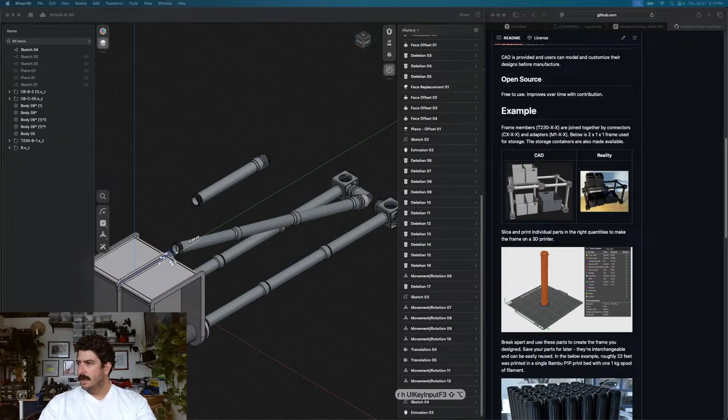Okay, this is going to be a silly one. Behind me, you'll see a bike. That's a ledge. I'd like to hang my bike from that ledge. I'm going to design a frame to do that. I've already gotten started. Kind of sit here. This is using the tinyFrame system I developed.

So tinyFrame is a modular framing system, and it's made of pieces that you can easily 3D print. And it lets you create things like this. Think of it as like PVC. These I keep in a box, and they're great because I can quickly pick them apart, assemble them, and then put them in the storage box like this. See? Like I said, just like PVC.

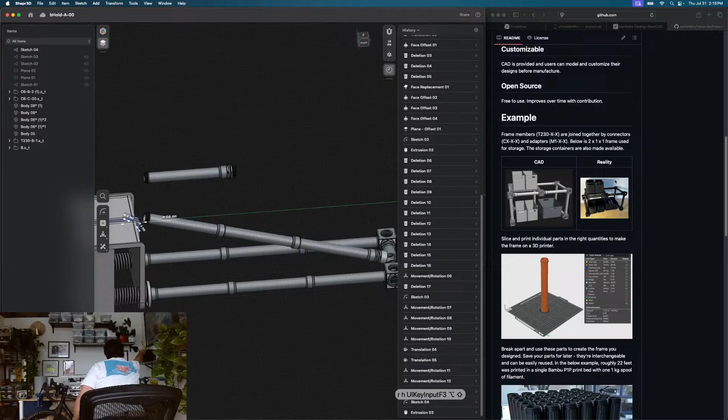And you join them with blocks like this. You just print a bunch of them, and you leave them around. And when you need them, like I do right now, you pull out the replaceable and reusable pieces, and then you design small custom components to make it work. And that's what I've done here. So we're actually going to go through and just design this thing real quick.

So it's really, I love this framing system. I initially designed it for a humanoid robot that I'm working on, just as a quick sort of tooling framing system replacement. Because you never know, you might need to hold just the torso, you might need to hold just the arm, and so being able to quickly rough in some design in CAD and then pull it apart is very cool. So we're going to do that right now. Except we're going to do it to hang my bike.

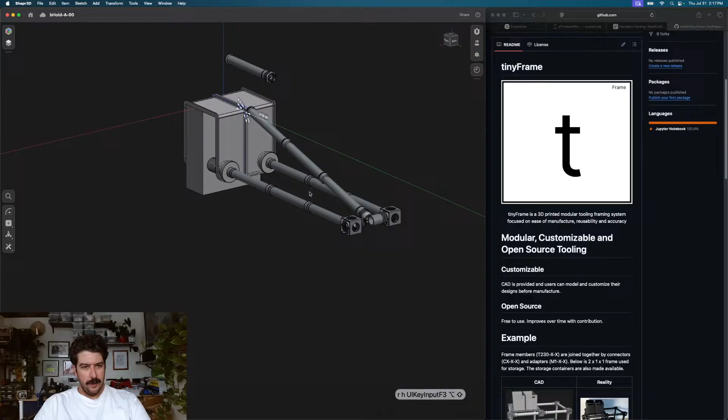My wife, by the way, hates this idea. She does not want this. As a matter of fact, you can't see it, but there's a closet to my right, which might be obstructed by this. So she might veto this, give her veto rights. But nevertheless, we want to design this because it's fun. So we're going to design this for fun. And she will veto it if she wants.

And then, after I finish this real quick, we're going to move on back to the part tumbler here. But this is just going to take 20, 30 minutes, hopefully, maybe an hour. Anyways.

Okay, so I was just creating the mounting holes for this. So the way this works is these members will be in tension. The bike's going to hang from here. We will put these members in compression, and everything's going to be great. Actually, yeah, let me finish this detail, and then we'll get back to this.

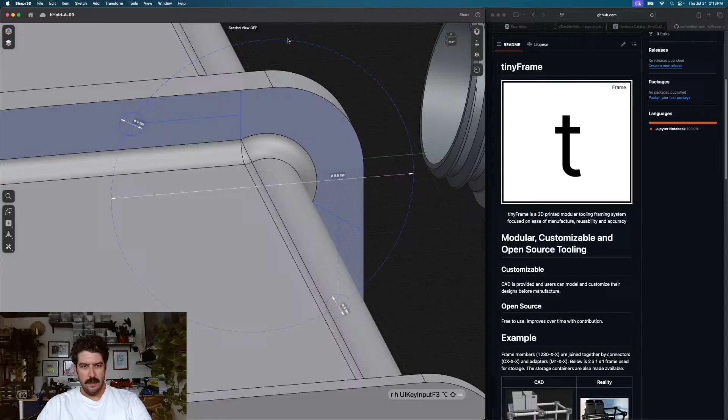So I'm realizing I might need a little extra meat here, because I think this is not going to be strong enough, so I'm going to edit the sketch real quick. So I want this to have, I don't know, call it that. Just a little bit extra to reduce the likelihood of block pullout, shear failure, which I actually don't remember the name of specifically. I think it's block shear. It's the name of that failure mode. Essentially pulling this hole out of the part.

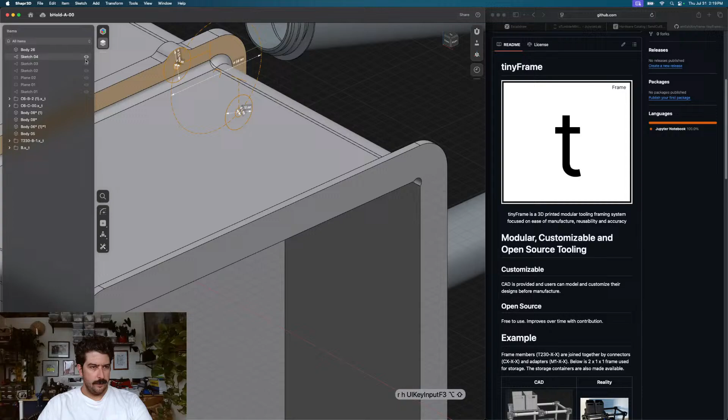Put some healthy fillets on this. We'll continue cooking. Okay. All right. This hole went away, so let's fix that. Okay. So now we have to terminate these. See if I can quickly do that. Ta-da. Okay. As a matter of fact, though, I think this is going to rotate a little bit because I'm realizing 3 members might not be enough. So I'm going to do that.

And I move the distance, essentially, of one of these members. Okay. Make a copy and pull them in. Ooh, that's wrong. It's fine. Another translate.

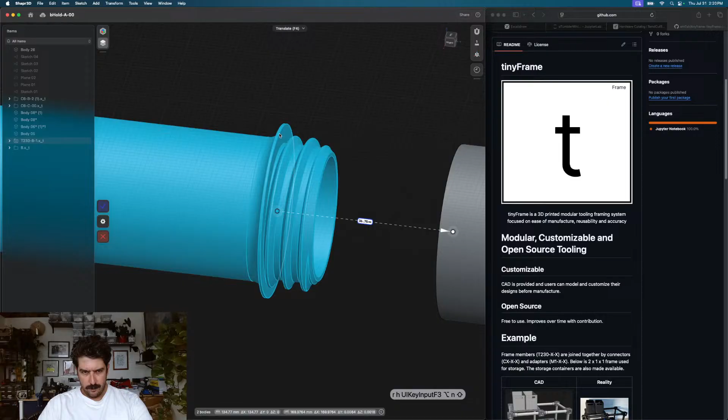Hope the audio is good. Probably is. Or as good as it typically is.

We'll add a 4th one here. And this will be the last member, so I'm going to just reinforce this. Actually, wait, we have to calculate this new angle. So, 1 second while we do that. Actually, honestly, there's no reason to get too into the weeds on this one, because we're gonna resolve the position of this when we get there, so I'm actually gonna just align this. Only faces of highlighted components. There we go. And then that out. Okay. Looks like it might be a little too long, but I'm okay with that.

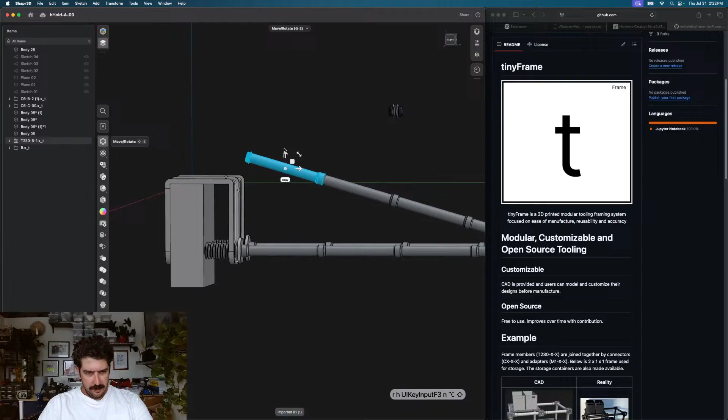So now we're going to rotate this into position, and we're going to pick our pivot point, which is that. We're going to play with some angles here. 5 was a little too much. 4 seems to be almost right. Not quite. 3. 3's cooking. There we go. All right. And then now we have to develop this mount.

Mounts to this. So the idea is this sits on the wall. All right, fix it. So this actually slides into the wall, like so. And then you use these tensioners, you twist them, and they engage the wall. That's the idea.

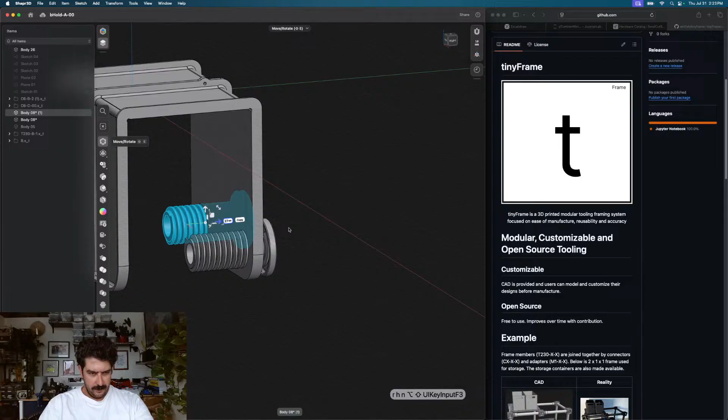So now we design our mating block, which honestly is going to be pretty much a copy of that. I wonder if we can just 180 that. Should be able to. Pull that onto the end of that tube.

You gotta think of this as just like PVC pipe, but with CAD you can download. That's the way I'm thinking about it. Which there is no CAD for PVC. PVC is also not a structural thing. Actually, this is also not a structural thing, I should say. So, warning, this is not a structural thing. But in low risk environments, you're good. So I'm not hanging this over anyone, and I don't really care about the bike, so.

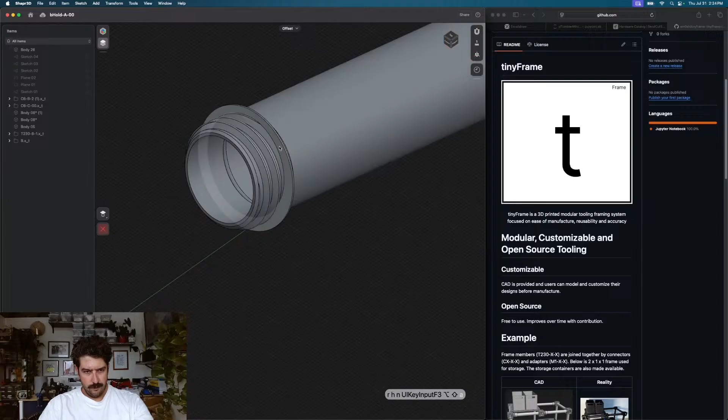Okay, let's move this back a bit. I'm just trying to cut this tube in a way that makes sense. Okay, and so now we're going to create this block that's going to mount this. And remember, this is going to be in tension. So what's the best way to model that? What are we thinking here? It's going to be a block. It's going to look like...

Does this work? I'm realizing I might have made a mistake here. That kind of works. Forgot to put... No, this works. We'll be fine. Okay, so we need to put a block here. So we got to model this now. So we need a part that joins, essentially it's going to be this line here. I'm just going to draw something really ugly to start, just to show representationally what I'm trying to do.

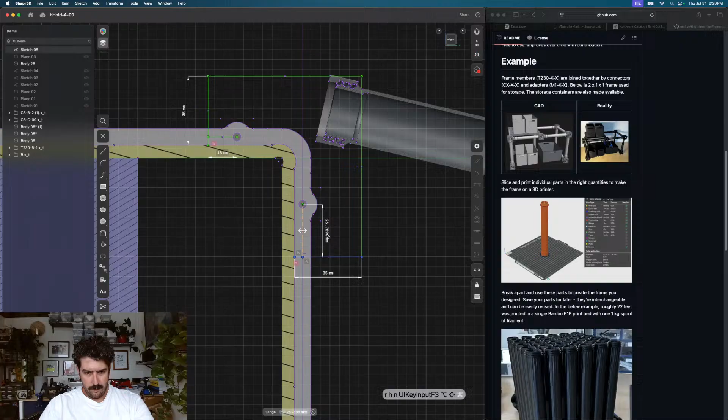Give it some reasonable dimensions, 35, 35. And then we will snap a dimension from there. 15 sounds good. That's constrained. Okay, so what we're trying to do now is create the first half of our mount. And then we're going to mirror that to the other side in a second, and so that'll get mirrored to the other side, like so. And we're going to terminate this into this block.

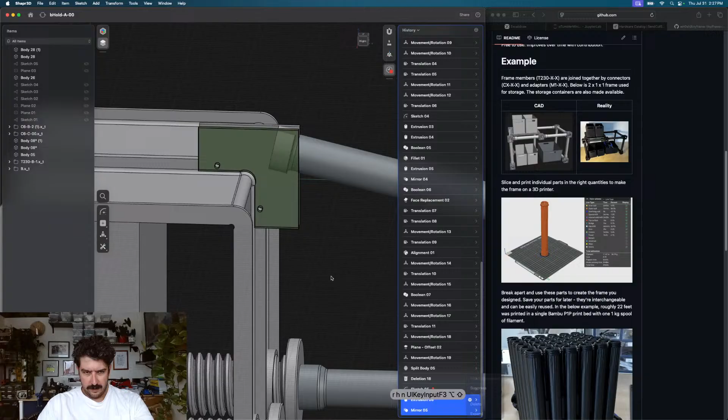Ooh, that is not symmetric. Why is that not symmetric? Why did my mid plane come off? No, that's right. Okay. What did I break here? Something broke. It's fine. Okay, so we want to put our mounting block in here. So let's actually take a step back. Actually, no, we'll hold on to this. Let me create another sketch and then come in here and find the material we're going to take away. Looks good.

We want to make that not go through our tube that we're trying to make. Okay. For the mount. Okay. So now we put in, actually no, we got to connect this. This is the mounting block. And we can turn that, so that's good. This can be fixed. So we have to find a way to get this terminated into this. So let's find an ugly way to do this. Actually, real quick, let's see what happens if we replace face here. Not the other way around. That's roughly acceptable.

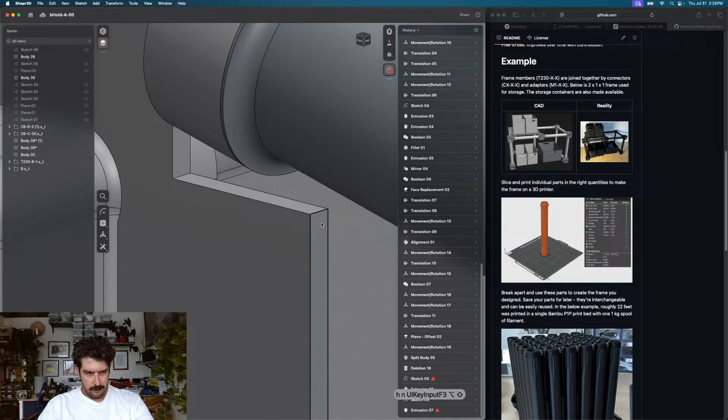So actually, let's delete this mirror real quick while we work on one side. Pull that back, and then let's actually first isolate these. We pull that back, and then how about this? We extrude this just 1 millimeter, just to subtract this profile. But we keep the original, obviously, and that breaks. Does that break? Boolean operation failed. Oh, I see. This should have been a new body. Okay. Subtract and we keep the original. Now we have this profile contour.

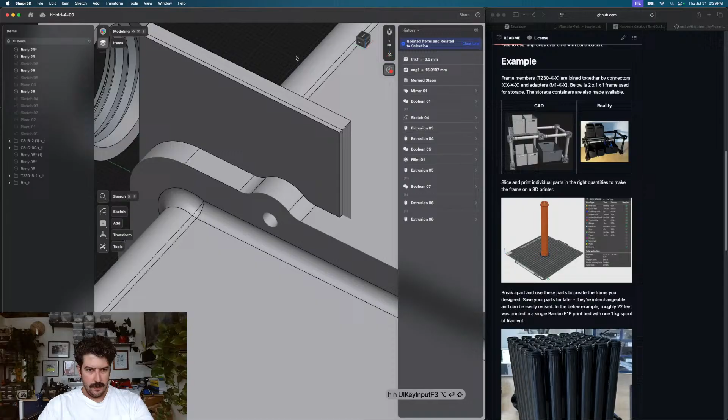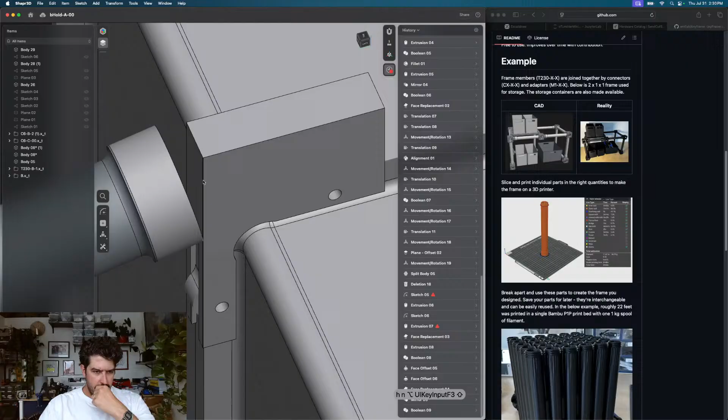And while we're at it, let's actually clean this up a hair. Yeah, that's actually almost perfect. It's great. I want to try the loft command for a change, because I seldom take advantage of it. Okay, then we extrude this face out. Then we mirror. Then join, and then we're gonna try and loft this. This might be a little too small of a surface to do that, but give it a shot. And then let's actually clean this up a hair before we do that loft.

We're actually going to go back to an isolate here in a second. That's going to be all right. We gotta loft this face onto this face, but we have to figure that face out first. So this isn't gonna work, but I'm just trying to show what we're trying to do. So if we do this, it bugs as it should. So what we'll do is we'll slice this in a way. We set a baseline that makes sense. We'll try the loft one more time.

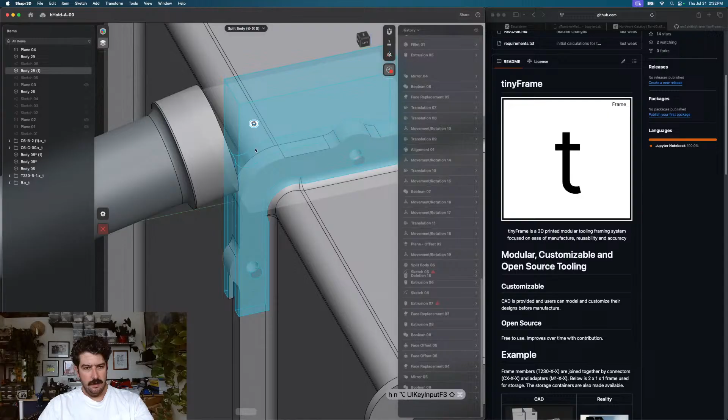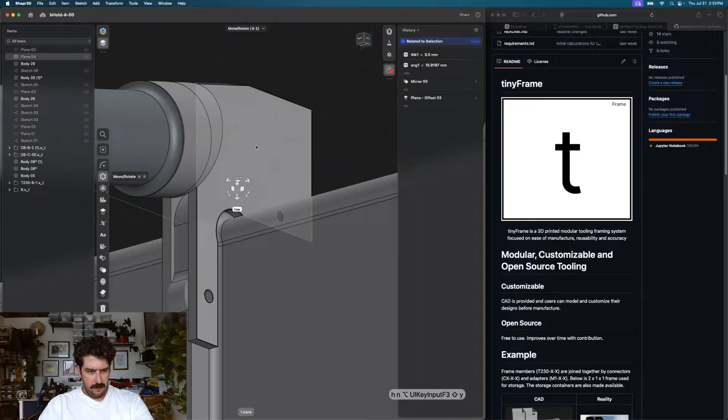It also bugs. I think it's because we have this surface here. Maybe we have to make that circular. Maybe that'll work. This might work. Yep, there we go. Doesn't work exactly the way we wanted, but maybe that's okay. Let's actually pull this back a hair. Let's see if we can make this work. It's looking more real. What if we loft? Actually, let's join these real quick before we keep going. And clear history. It's slowing down a bit.

Okay. Let's slice this and see if we can. Actually, we can just brute force, I think, chamfer this. That's probably what we want to do. We can worry about lightening this. This was 11, do 11 on this side. Actually, let me just slice this down the middle so we don't keep having to duplicate our work. Let me just clean this up. Okay. This also needs to get cleaned. No. Can I replace face here? Nope.

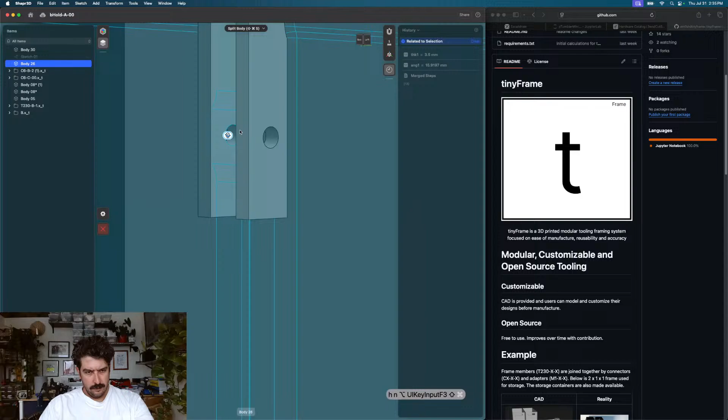Okay. So we're now going to join these. Actually, before we join these two, I want to hollow this out. So I'm going to do my favorite thing, which is the shell tool. I'm going to pull this in and see what we can get out of this. Actually, I already have a variable set for this, so we'll try that. Cool. So that looks cool, but it is not injection molding manufacturable.

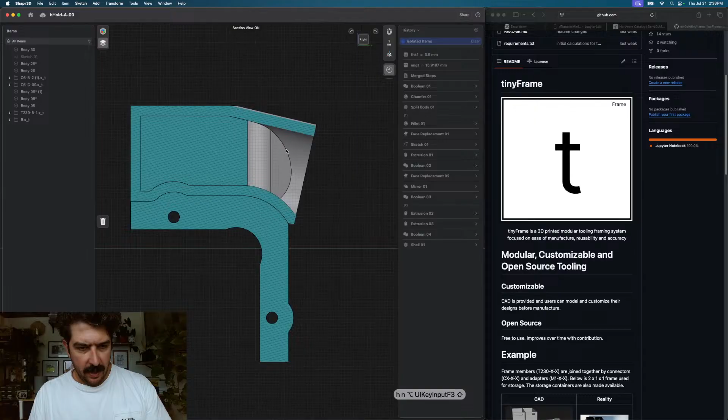And the reason for that is we have an overhang, and I'll show you. So if we look at this in section about this plane, right here, what this is saying is that when we try to, actually let me draw. When we actually try to insert the core here, it's going to happen from one plane, like this. And so we're actually going to intersect with this portion right there.

If you don't have one of these and you're an engineer, I highly recommend reaching out to your contact at Protolabs and asking very nicely for one of these injection molding toys. It's a toy, but it's super useful because it shows you what all of the nomenclature is for the injection molding process, and actually helps you think through some of the injection molding steps.

And so the way that this is currently drawn, we have our cavity, we have our core, and the core and the cavity join, and then through the sprue you inject your material. When you're done, you pull out this secondary core, like so, and then your part comes out. What I'm saying is this right now is a little too complicated. We will have to figure that out.

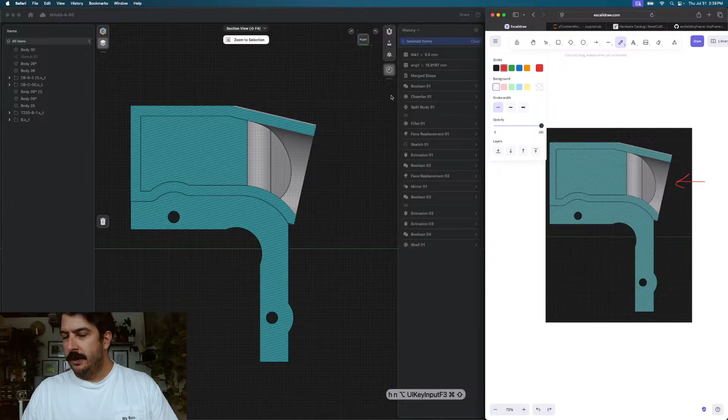Also, this is 3D printed, so you're thinking, well, why is he even talking about this? Skill issue. You should always design your parts as though they will be injection molded. A, because we can, and B, because it makes you a better engineer. And C, because if you ever want to mass produce it, you don't have to do a total redesign. So how would we do that? We have this weird angle.

The answer is we have to pull a sketch, we have to draw a line that represents the insert line for our core, and then we'll have to fill this material in. That's the answer to that. And the way we can do this is to, there's our line. I think we just bring this material down. And I wonder if there's a way that we can just draw a plane on this, slice it, and see if we can mend it.

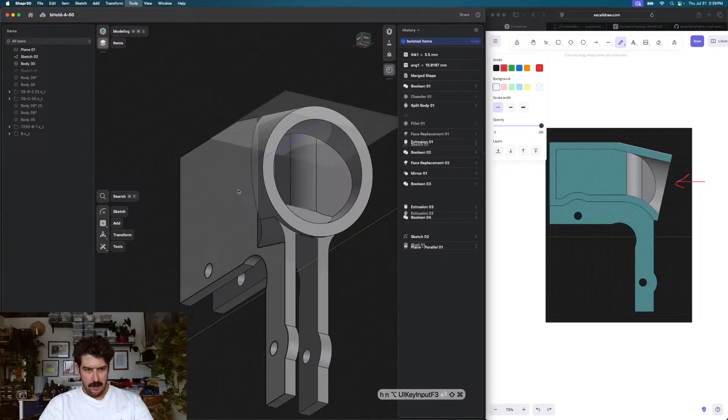So parallel to that face, we're going to go to this line and then slice this. And then it bugs out. Why are you bugging? It's because we have some tangency here. So I'm going to move it just a tiny bit, and this should unbug. It's not Shapr's fault, it's the Parasolid kernel's fault. Well, it's not just Parasolid, every kernel is bad at this. So, all right, so that's what our part is going to look like.

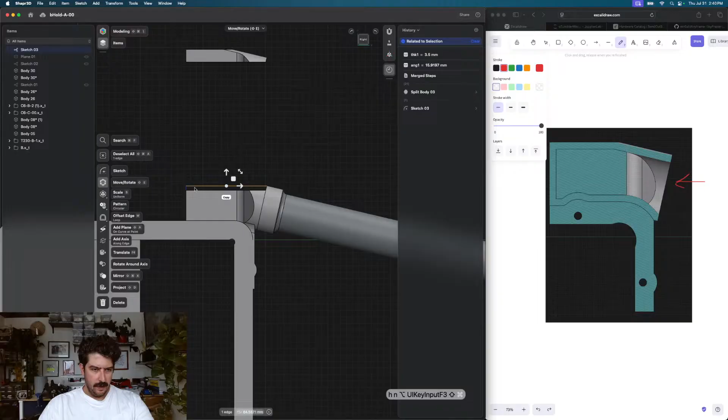That's probably okay. So how do we mend that? I think we do just a straight line. Another sketch here. Another straight line. Join it there, and we extrude that through. Ooh, we need to really extrude that through by first getting some lines that make sense. We can go back to a reasonable view so I'm not confusing you. What's the right view? Right view. Okay. Now we can extrude this. We'll do a symmetric and we'll pull it out. Do a new body. And then we'll get to slicing.

If you hear jets in the background, it's because the Blue Angels are actually performing in Seattle this weekend and they're rehearsing. So apologies if the sound of freedom is deafening you. It's probably also a skill issue.

So what is this radius? 8. 8. Okay, and so now we'll slice this about the midplane. We'll mirror that over.

I have to say, doing engineering with F-18s in the background is pretty cool.

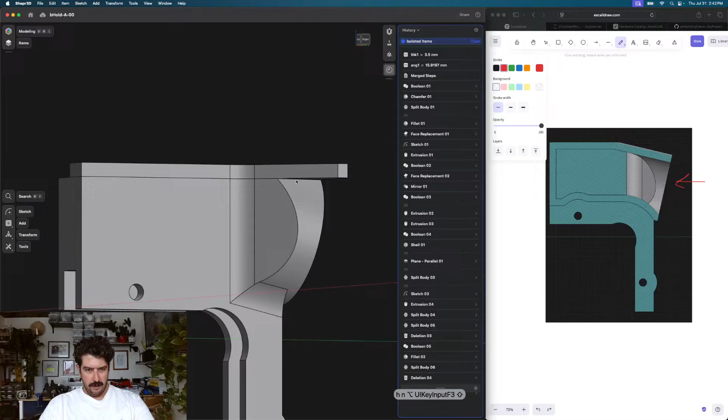So before we mirror that over, let's clean up this as well. Honestly, now that Shapr3D has slicing with a cylindrical surface, I've used it 5 times right now. It's been such a game changer, I love it dearly. Okay, so now this is injection moldable, because when you insert your core this way, you'll be able to get that.

Now, I think we're done. All of this material is redundant. If you look at the load path, this is in tension. I'll draw on this - this is in tension, and we will not want any of the material here essentially.

And I can quickly get rid of that by just pulling a chamfer to clean that up. Oh, but there's something going on the inside, isn't there? Yeah. Oh well.

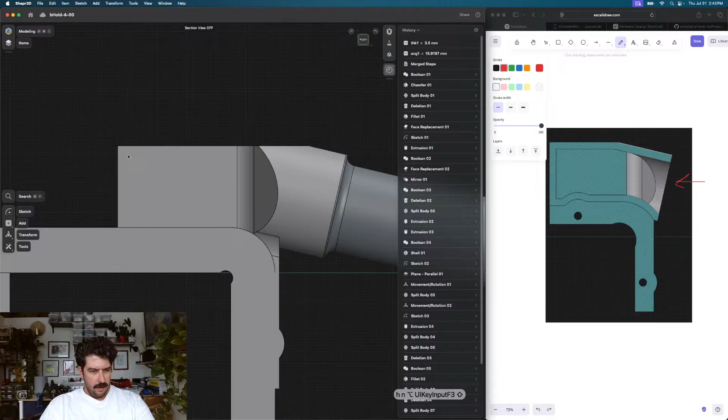Actually, not oh well, let's fix that. So we'll chamfer that. Oh, we still have this injection issue here. All right, we're gonna run into thickness issues here, but we can deal with that later.

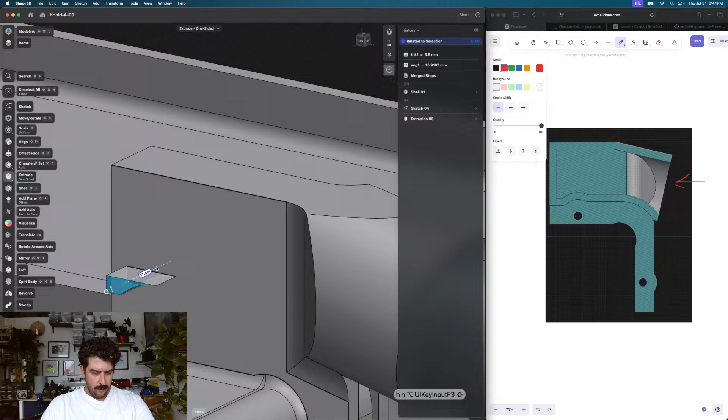Okay, we need some radii on these too. Want some radii on these as well. Nope, we want this. Yep. This one as well.

This might be a bridge too far. Oh, that's a bug, gotta figure that out. I think we need to replace face on that though. Let's surround - get a good view of that gap. We created some gap here we have to fix.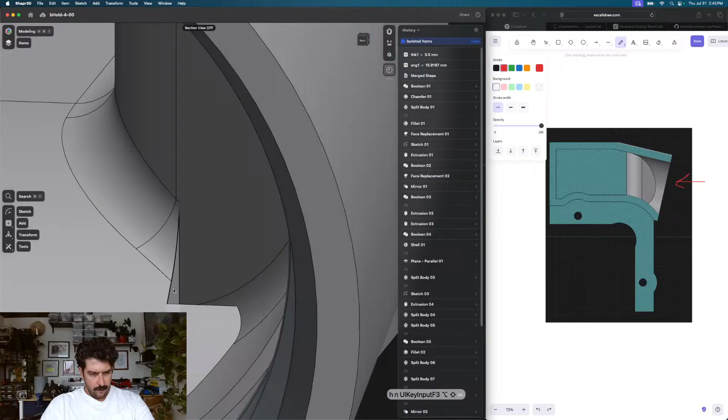Okay, just brute force that. Good enough. All right, so there is how I'm going to mount my bike. Join this. Fillet there. Okay, cool. So I'm going to go build that and then see what happens.

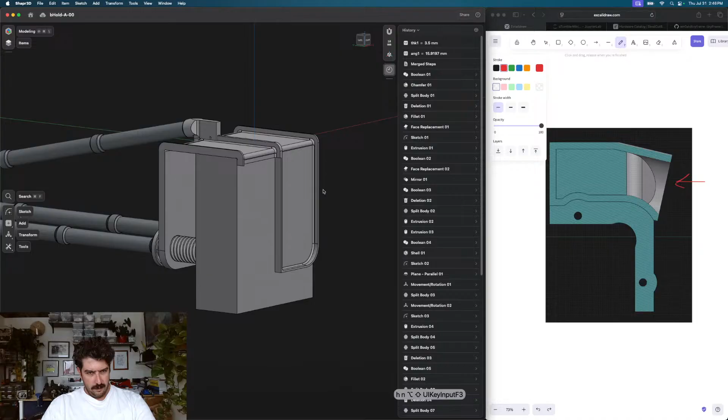Which one screws through here? I'll deal with that later. I just need to make sure I have at least 25mm-ish M4s. This bugged, I wonder what happened there. It's fine, it's symmetric, so I can just mirror that. Cool.

All right, easy peasy. Actually, first I want to - this looks a little weak. The chamfers.

Said 11. Yep. Okay, there it is.

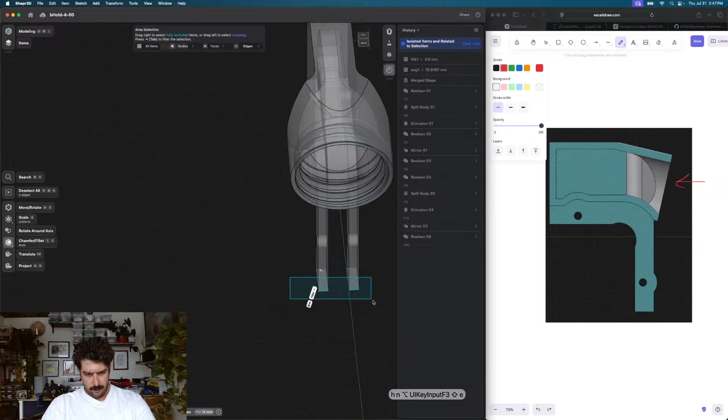This looks wrong, so we're going to unwrong this. Still looks very wrong, but I don't know how to make that any better than it currently is. Just leave it there, it's kind of ugly, but it's actually really ugly. Why is that so ugly? And why is that so ugly? I should just delete this. Yeah, all right, I'm gonna de-ugly this.

So my thinnest material is right there - my thinnest material condition, I should say. So then we'll make this tangent and then use this to slice.

Why did that bug? I don't know.

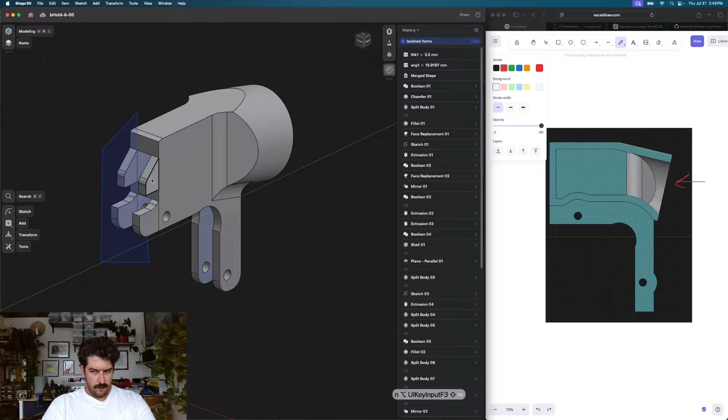Okay, we can just leave that pretty much empty, I think. No big deal. Then here, we fix this, doing the same method.

Make this some arbitrary angle. Okay. Still ugly, but less ugly. Okay. Cool.

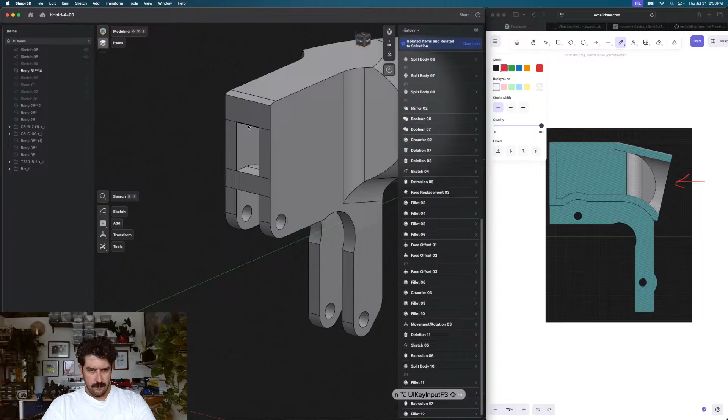Right, so I'm going to oversize these holes just a hair for clearance.

And then need to offset these faces so this can actually fit on. Right now it's wall to wall, so we'll just do a negative 100 micron offset, and I've already got it gapped up top here. Yeah, we're good there, so that should fit. 200 microns clearance is plenty. Okay, that should be done. What am I forgetting here?

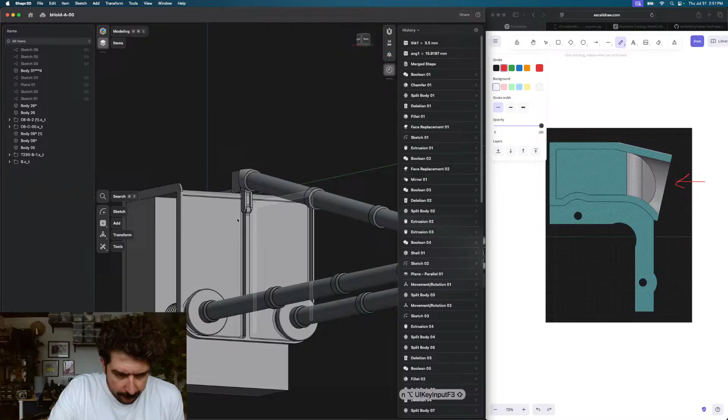Let's just do a quick calc real quick. I actually don't know what the load is going to be here. I want to know what it is. So we'll get some geometry here. Calcs.

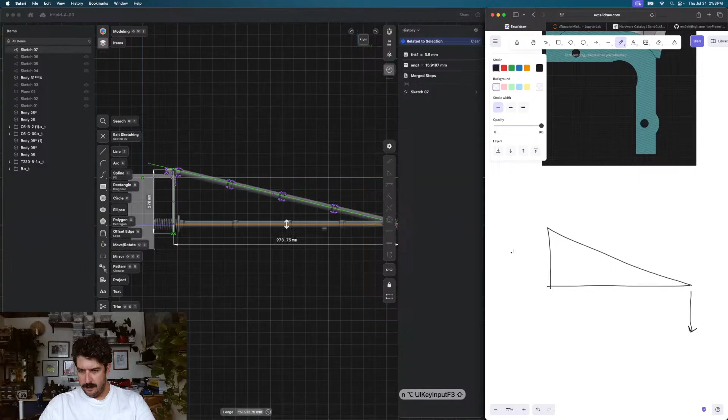Is there a way to snap center on this? Because it doesn't really matter, call that 270. Alright, so draw this out here - we have a triangle. This is 270, this is 970, and then this is 1000. Very convenient.

Wish you could see this - they've actually got the formation going right now. It's pretty sweet, and they're doing it over the city, which is kind of scary.

All right, so we have our load P. So let's do the calc on this. This is technically just a reaction force here, and this will be the counteraction force, R2. There's no vertical component here, there's only a vertical component here. Call it RY2.

So summing the forces about Y, it's pretty simple - RY2 is equal to P, so that one's pretty easy. Summing the forces about X is 0, so really, yeah, R1 is equal to R2.

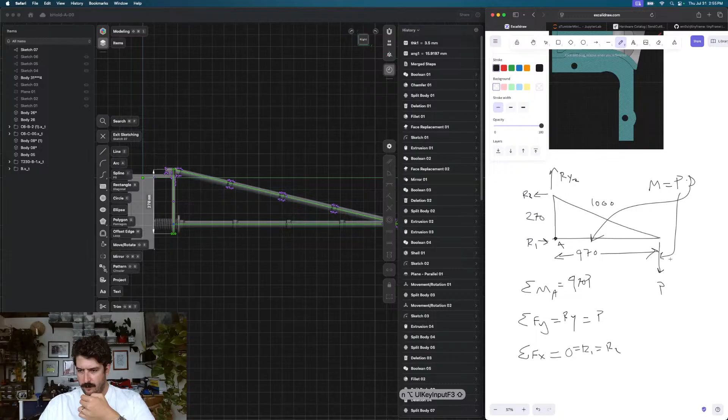I should say this real quick, that P is just the weight of the bike times a safety factor. I'll make this more legible. P is equal to R1 is equal to R2 - actually, let's do the distance, 270 times R2. Yeah. It's pretty simple, huh?

So R1 is equal to R2, which is equal to 970 times P divided by 270. So R2 is equal to R1, which is what we just wrote out, 970 divided by 270, which is 3.6 times P. And what is the weight of a bicycle?

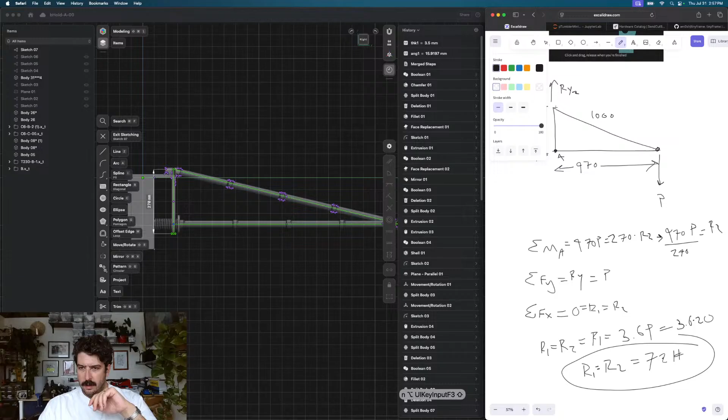Actually, just to make this clear, so 72 pounds. These should all be pinned. And this is actually not acting pinned, which is a problem. So we should actually get rid of this bolt here to make that act as though it's pinned.

That sounds smart. I'll build and test. How about that? Then I'll see. Okay.

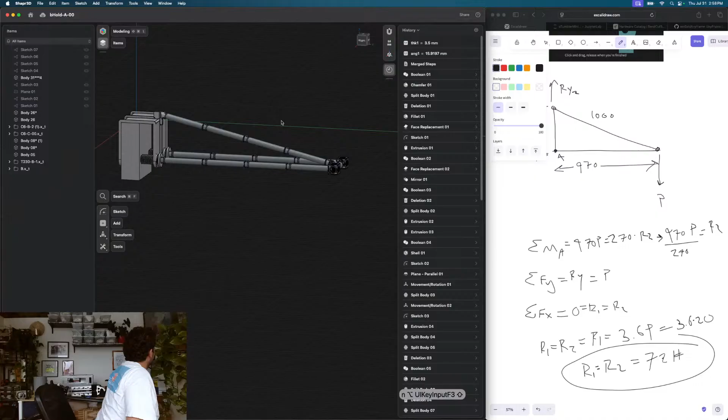72 pounds of load. Can this take 72 pounds? Let's find out. Yes. That's a joke, by the way. That is not engineering sanctioning or advice that the system can do. Take 70 pounds. Okay, so that's that. I'll go make this later.

Back to the tumbler. So I am liking the new diameter.

Oh, before I forget, I tried something, check this out. This is a part that I nested in another part and printed on top of. So I can actually slide this out, I think. This looked like this. So I printed the bottom block, and then I set this on top, and then I printed it, and it actually enclosed it. I wanted to try this because people have been talking about putting nuts into parts and then continuing to print. I really like that idea, and I've managed to do it. You just add a pause. So that's very exciting.

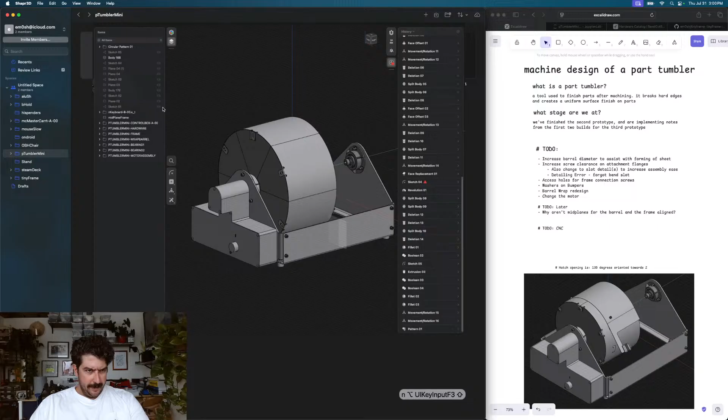Very cool. All right, anyways, back to the tumbler. Let's make a copy. We are on mini B, and we are on version A of that right now.

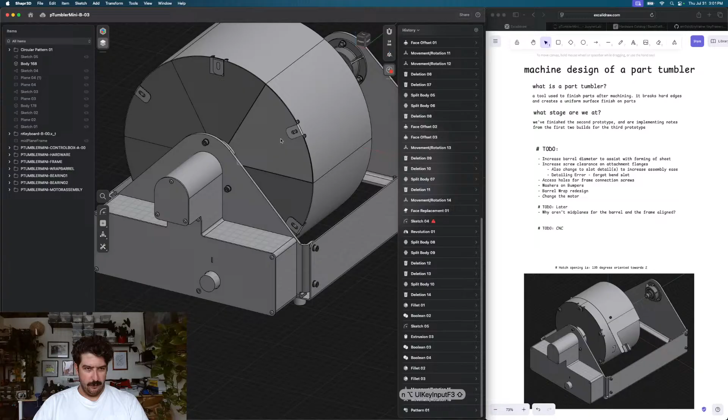I used to work in San Diego, and they have a big military base there. And it was always funny being on a call and you hear just F-22s just roaring by. Made it tough to pay attention.

All right, so what do we have left? Diameter of the barrel we need to fix. So nothing in the design changes in the bearing, and I do think we end up changing the diameter of this potentially. Depends on the latching mechanism, so we'll leave that for now and see if we have to adjust the frame.

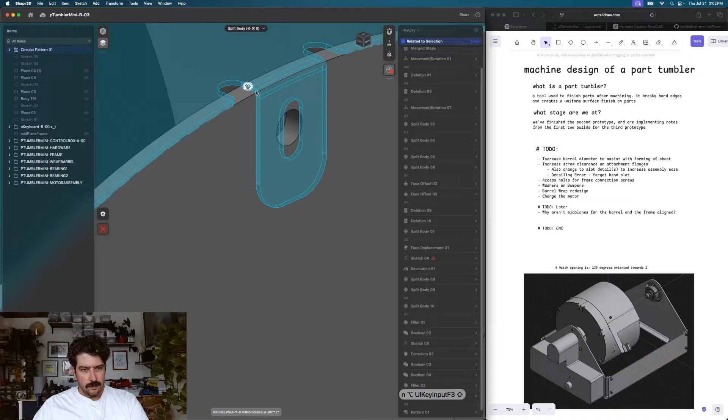Okay. So we're gonna have to add, not a crease, an overlap here. So first, let's just clean this up and join it.

PEM nuts in the wrong place. Gotta fix that.

Crazy that you can fly F-16s feet away from each other over a city like that.

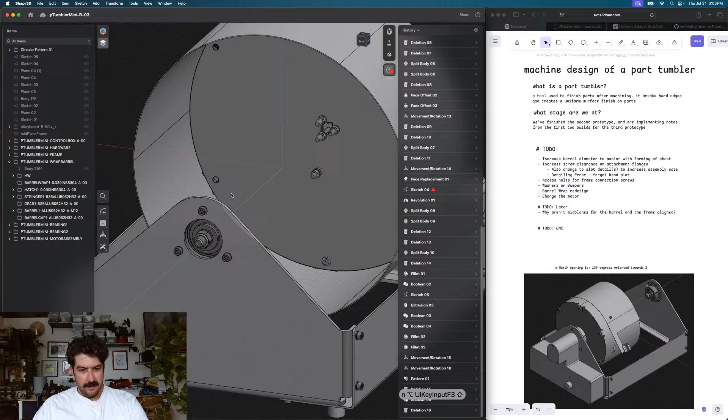All right, and let's save this. Actually, we want this mid-plane, I think. Where'd mid-plane barrel go? I guess this is the mid-plane, so I don't really care. Yeah, we don't really care. We'll save mid-plane frame though.

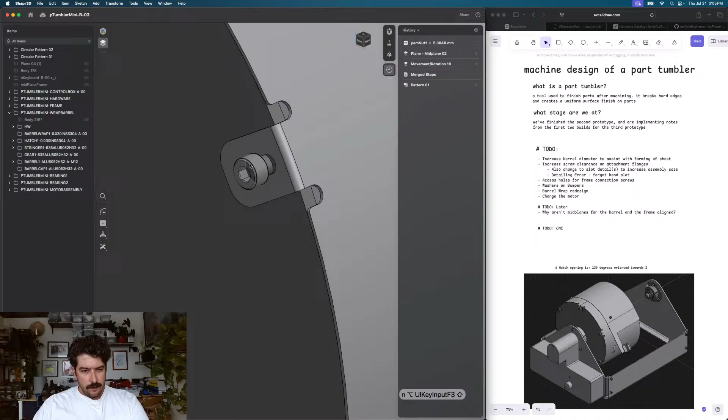Get this hardware patterned out. Okay. What else? We have to do the hatch.

We said that was 135 degrees. That's 135 divided by 2. And then we'll mirror that to the other side. Slice this. And actually, we also want to just put some arbitrary distance off here. Call it 30 millimeters away from the end. That'll be our hatch.

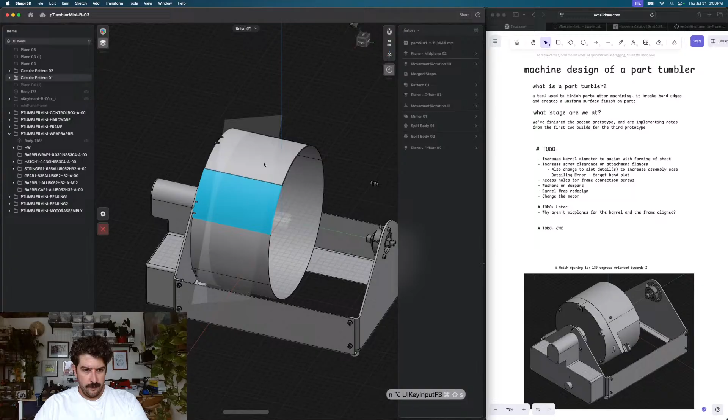Okay, here's our hatch. Let's pull this back over. See if we can just copy this in. Why is that bugging?

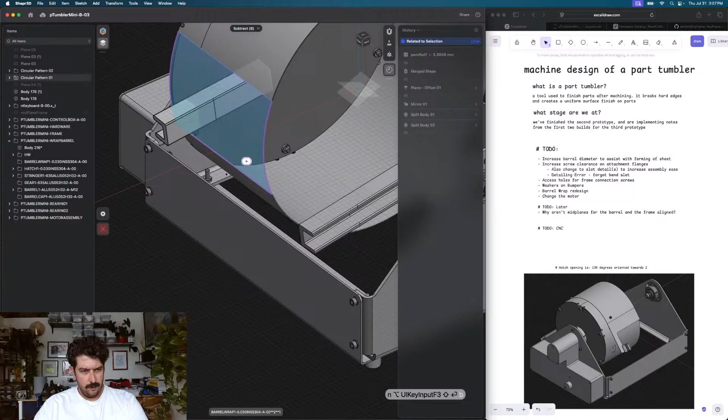Okay, so there's our geometry for that. And then we want to pull down that strap again, but we'll do that in a second. So does this, oh, we want to get the length right too. And actually that length, it was getting pretty close to the maximum dimensions we were allowed for this.

So we should investigate that. So we're looking for maximum material. We were using stainless 304 at 30 thou thickness. So the customs can go a little bit bigger, but I think it was that 30 inches that we were worried about. So right now we are at 30 times 25.4.

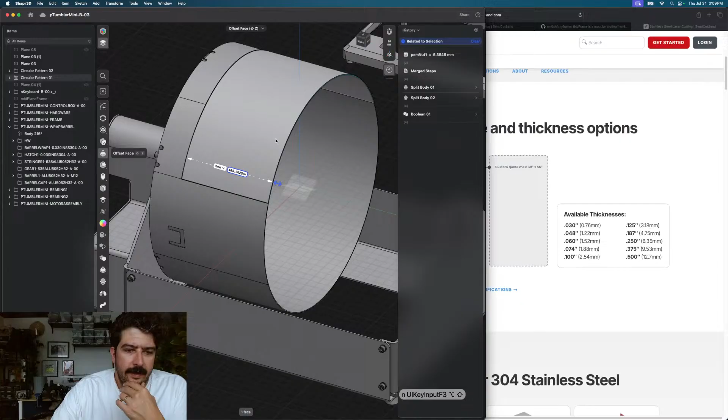So we can do 760 millimeters total. We are at, oh, we got plenty here. Yeah, we're, oh, but you know what? The length. The circumference of a circle is 2 pi d, or no, it's pi d.

So we're at, I think we said 250. So we're getting close. We're at 250. So that's 785. We actually can. I mean, technically we can. We're gonna have to get a custom quote maybe.

Is there a workaround on that? It's annoying. We're just off too. We're just off by like 20 mil by 1 inch.

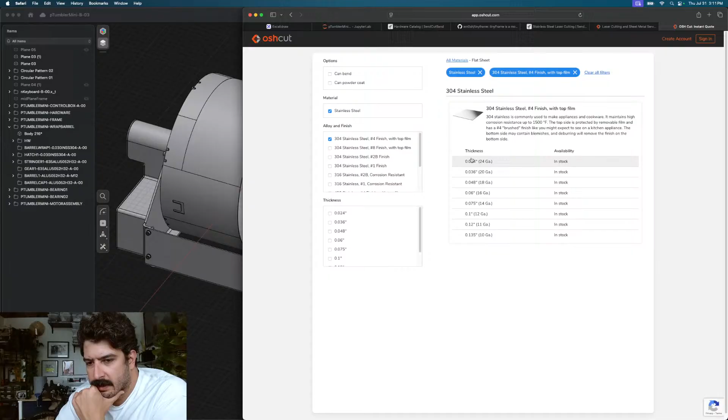Funny, they've actually got different thicknesses. 30 gauge, 30 thou, and they've got 24 and 36. I actually want 24. Interesting. It's definitely thicker.

Centrifugal tumbling. Would you look at that? That's what we're doing.

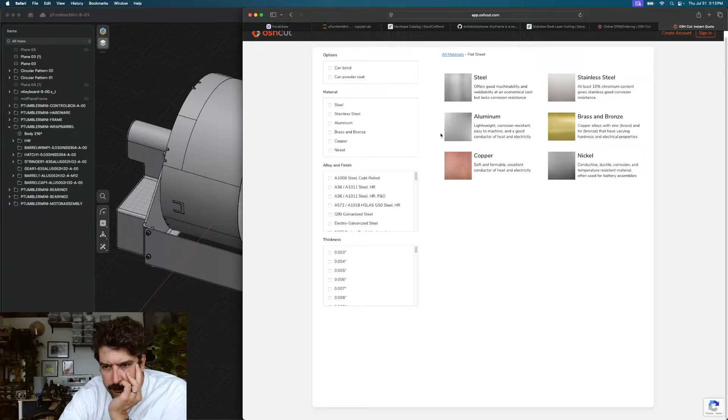Doesn't say maximum size. Doesn't say. All right, they can still make it, it will just be suboptimal. That's okay.

We actually want, we'll slice that in a second. So this will be the hatch. Move this out of the way. To create that overlap now, so I'm just working on that overlap.

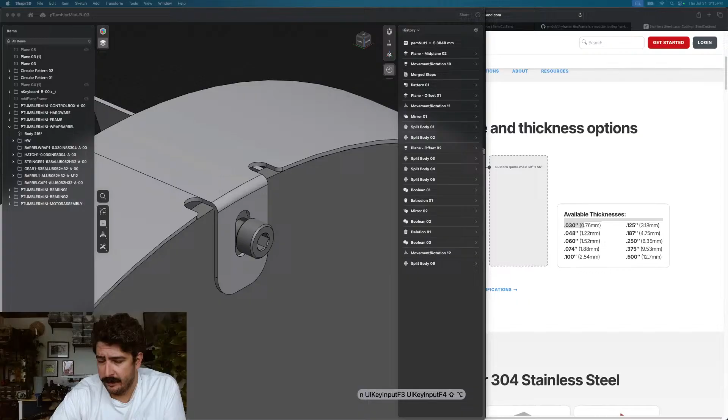All right, what I'm trying to do is create an overlap here. I don't know if I have a good view of this from before we made the changes to it. Maybe we do, I can show you what I'm talking about.

Yeah, you can see I had this overlap. Oh, that's right, we tried, we actually didn't brute force this. I remember now, this was a smarter way of doing it. And so we were worried about this gap, and I actually think we're okay with that gap.

We're going to find out if it's an issue, but I'm okay with that gap. So we don't need to do an overlap. Phenomenal, glad we looked at that.

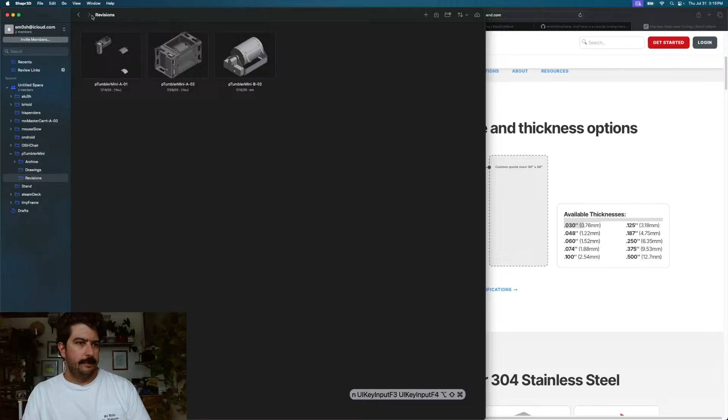So how did we do this? We split that. We just revolve - oh, what did we do here? I think I just did it the wrong way. Let me actually walk myself back a bit, see where we went wrong.

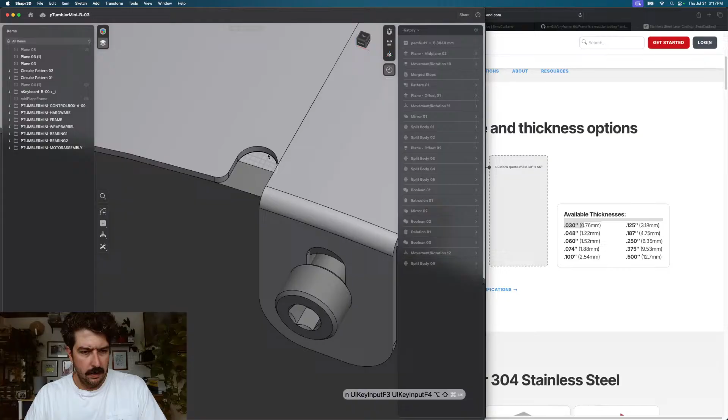Yeah, let's pull ourselves all the way back here and do an offset face. Actually, that's perfect right there. Great.

We'll pull this back just enough to trick the brep kernel into thinking that this is not the same face. Ah, it thinks it's the same face. I wasn't able to trick the brep kernel because it can see to 1 micron. Can you see to 10 micron? No, you can't. I win.

Okay, so let's copy this geometry over. How are we going to do that? Actually, what if we just mirror it? No.

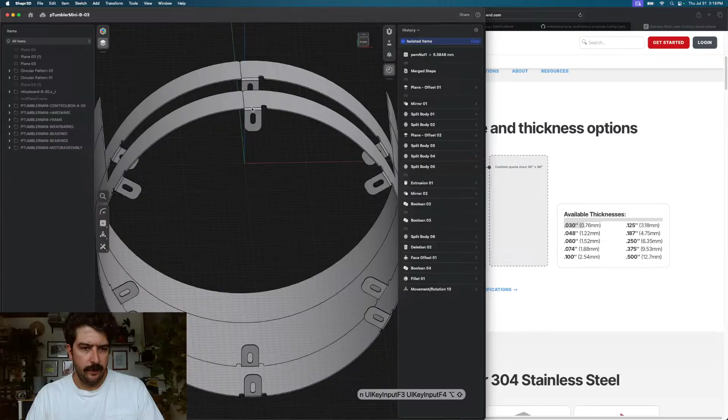Okay, and so how are we going to model this? Some more brute forcing, maybe? Brute forcing this.

So what is the thickness of this? So let's get an angle, maybe that'll be faster. Straight.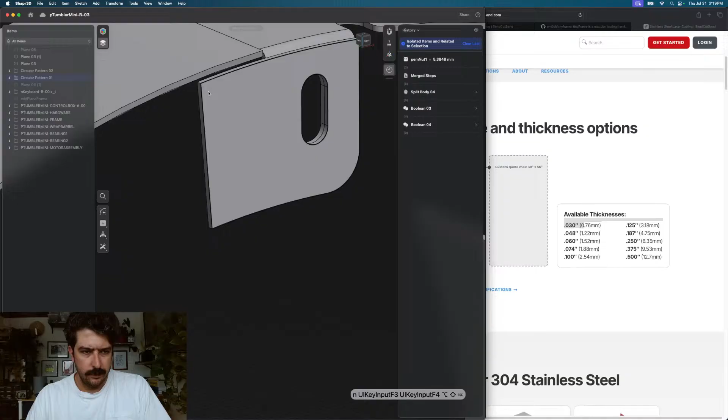We're just going to go off of feelings here, we're going to feel this out. Seems like too much. Seems like almost it, that seems just right.

It's breaking, so let's - I think we have to add a cutting relief there. I think we do.

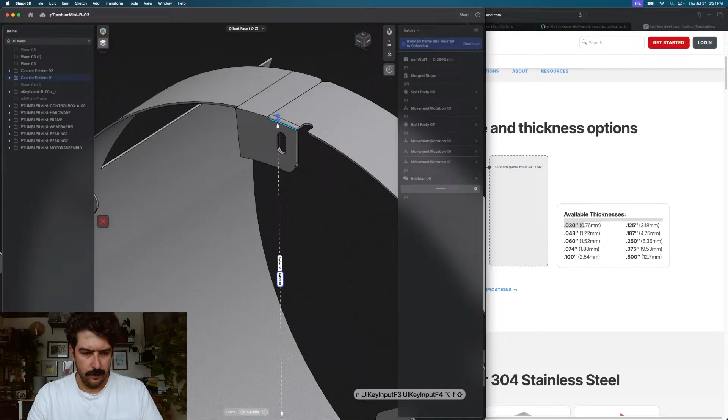Though we might need a little bit more. That edge distance is getting pretty bad. 1.45. Honestly, you know, it is what it is.

Actually, I think I know a better way to fix this. I'm gonna offset this. Some number 3, yeah, slice this. And then we'll bring this back up.

Makes you feel a little bit better. And actually, instead of 3, we'll make that 2.

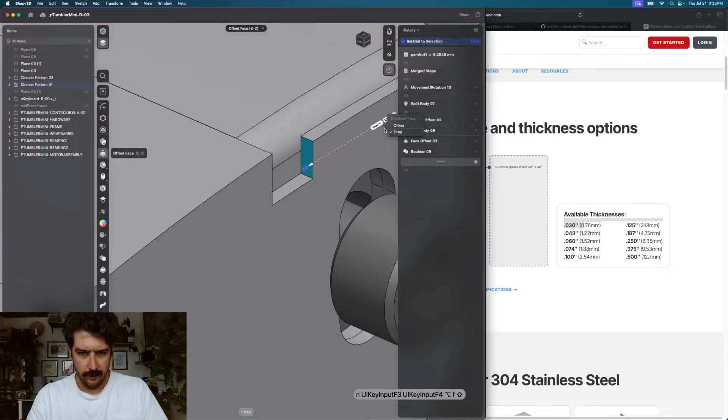See if that fillet breaks. I think those fillets are going to break. They didn't - good for us. Okay.

Before we go back to those fillets, let's see if we can fix this. There's a little bit more room here.

Blend's not possible. Try this, get to the point right before these blends and see if we can fix this.

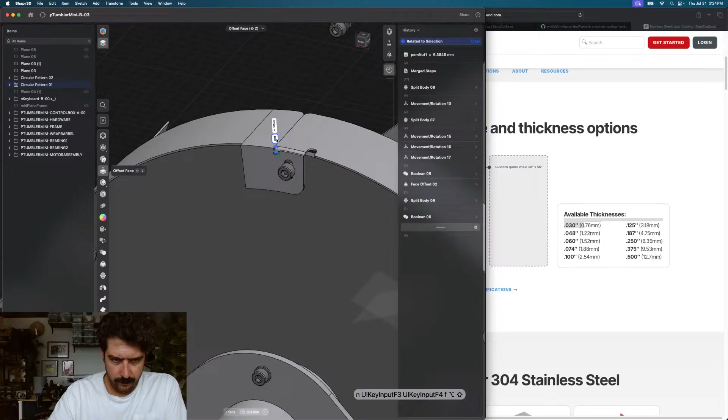That looks hideous, that looks awful. I don't know why, but I don't have a better solution right now, so you have to live with it.

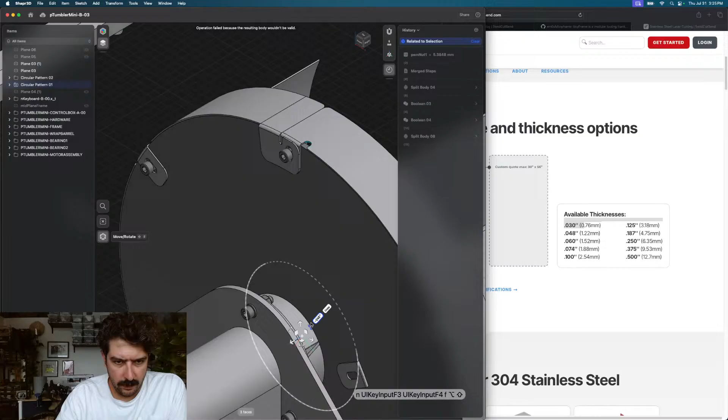Actually, not mirror, I'm gonna try and rotate this. I don't think it's gonna work, but I've been having really good luck with... nope, didn't work.

There's a way to brute force this, which I'll show you. I'm going to... oh, this joint, I have to offset that a hair.

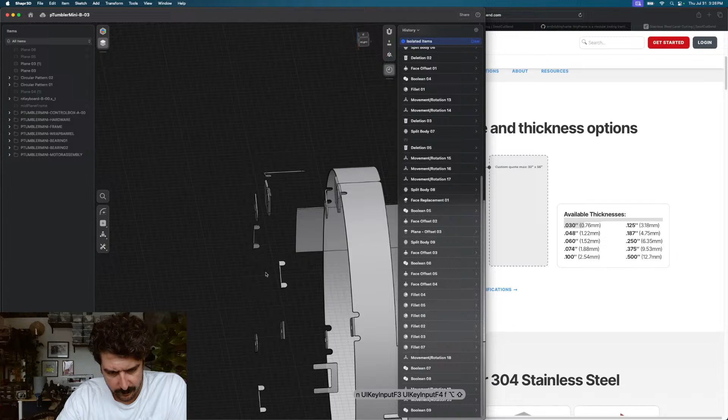So the way I can brute force this is to just copy this geometry over and then rotate it and extract essentially what I'm trying to get out of this. Which is this.

Why did that work? I'm having not a great modeling day. This is going way slower than I would like. That's not very good.

So I'm just gonna do this. Okay.

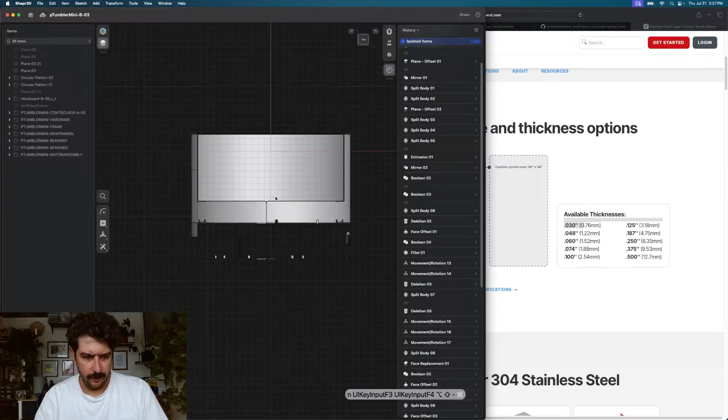So now I should be able to rotate this place. Almost. Almost, all right, it's more brute forcing. Sorry, must do what we gotta do.

So this is 2. A reminder, I'm doing this because I need a cutting relief.

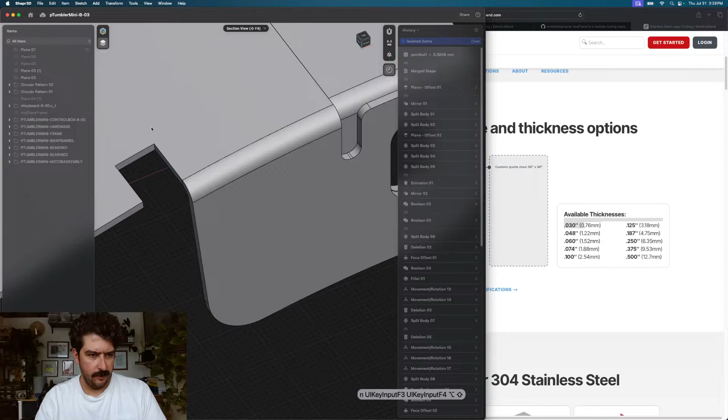Okay, all right, getting there. Let's make a copy of this. We were at B before.